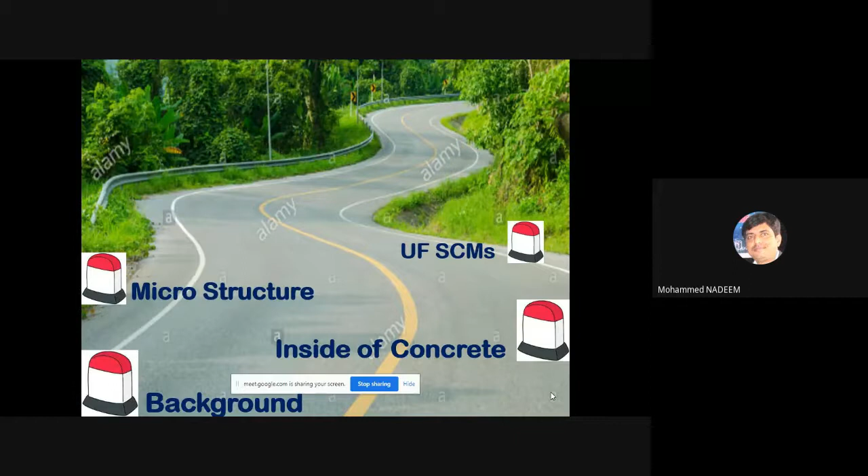So we'll see inside of the concrete. We will go a little towards the microstructure of concrete. Then we will see the ultrafine SCMs, supplementary cementitious materials. We will see the durability tests, case studies of national and international projects, various specifications, and conclusion.

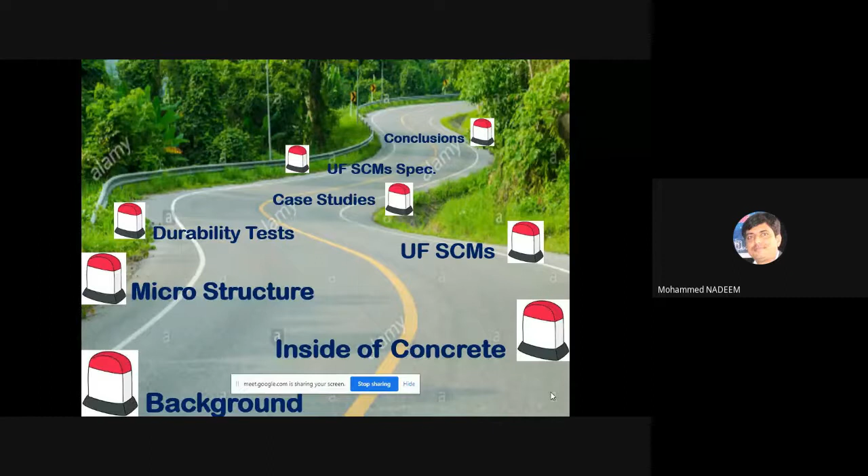Coming back to the importance of concrete microstructure. If you want to see the properties of any material, it is always governed by its internal structure. For example, in steel, if you change a small quantity of carbon, you get a different quality of steel. In concrete, porosity rules the properties. Of course, there are other properties we need to look into, but when we talk about durability of concrete, if you work on the porosity, most things are covered in that aspect.

So if you focus on the porosity of concrete, of course this porosity is at a microstructure level, most of the issues will get rid of from the concrete. And we are talking about a service life of 100 years or 150 years, which is possible if you focus on porosity. So in this topic we will focus on porosity and how to overcome this porosity issue in concrete to get durable concrete.

So in some sense, what is not there governs the material behavior. A best example is the present pandemic. Coronavirus is so fine, at a micro level it's less than one micron. But just see the havoc this created in the world, not only in India but across the world. And that's why even these vaccines are all being worked at a micro level. So it's a practical example. Whatever big thing is happening, people are becoming sick, a lot of fatalities are happening, but it's because of this very tiny coronavirus.

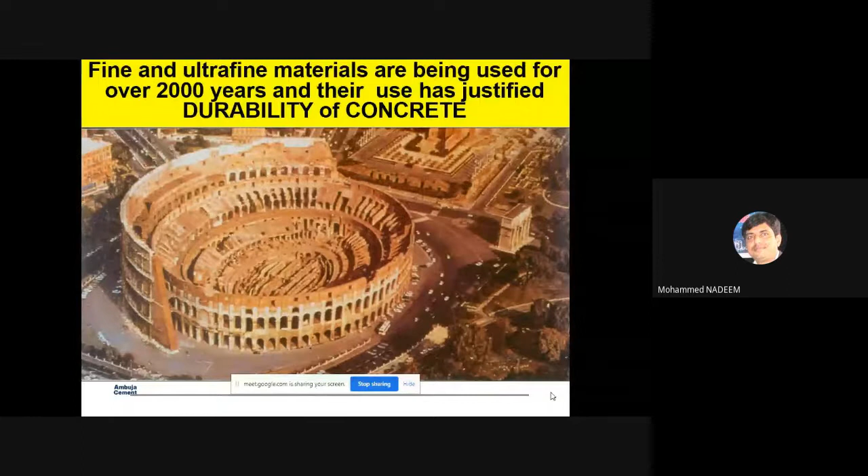If you just see the history, this fine and ultrafine material has been used in concrete for more than 2000 years. Best example is the Romans built the Colosseum, which is still intact in Rome, Italy, and this is reflecting the durability of the concrete. So people used to, along with the cementitious material, use these fine and ultrafine materials in concrete to make it durable. So this concrete is lasting for more than 2000 years.

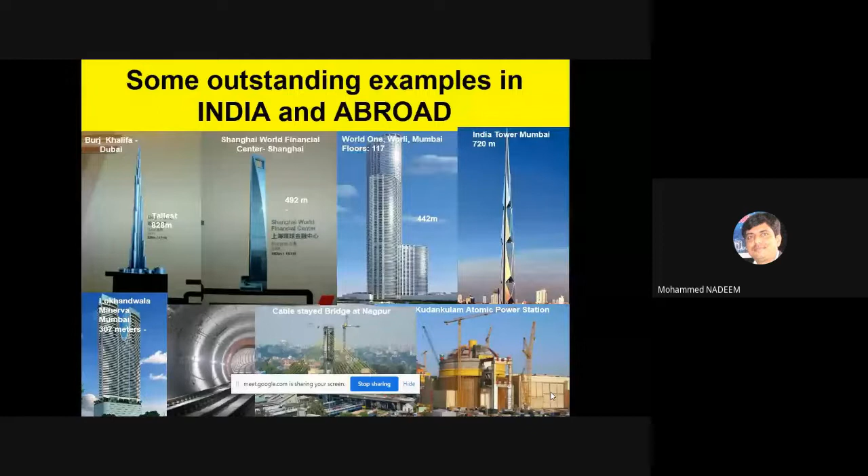Even in the modern world, a lot of structures are being constructed: Burj Khalifa, Shanghai World, even in India, World One, Mumbai. There are many towers which are coming up in the future. So a lot of structures are being built based on the usage of this material. And of course all structures are made up of concrete with a durability, in terms of service life of a structure, of more than 100 years. This is possible not only earlier but in modern structures, people are using it very effectively. Just to give a brief history.

This is how durable concrete... of course high strength concrete doesn't mean durable concrete, but durable concrete goes with high strength concrete. So as you work on the concrete, making it a high performance concrete, both things get associated with this concrete. So this is how we started making concrete.

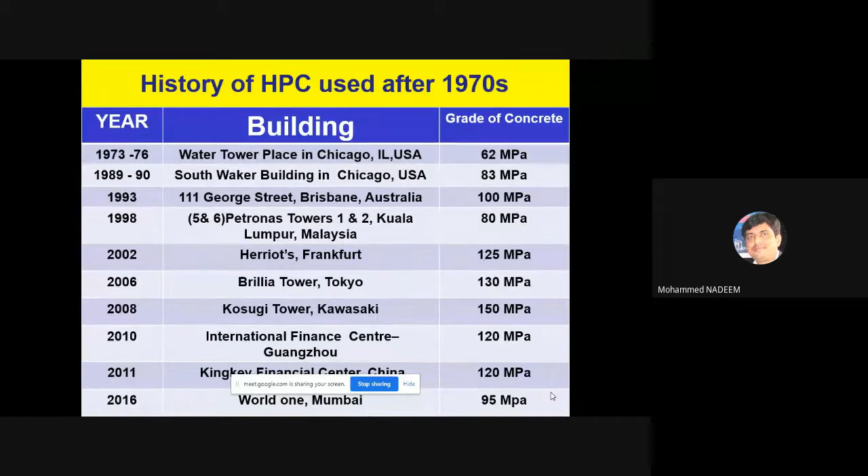Initially we were restricted to M15, M20, M25 grade of concrete. As technological development happens, the grade of concrete, the strength of the concrete increases. Strength of the concrete is also associated with durability, because we are reducing the porosity in concrete, reducing the water cement ratio in the concrete. So in turn, it's a reduction in porosity giving higher strength. There are many structures being built up; in India, World One, Mumbai uses M95 grade of concrete.

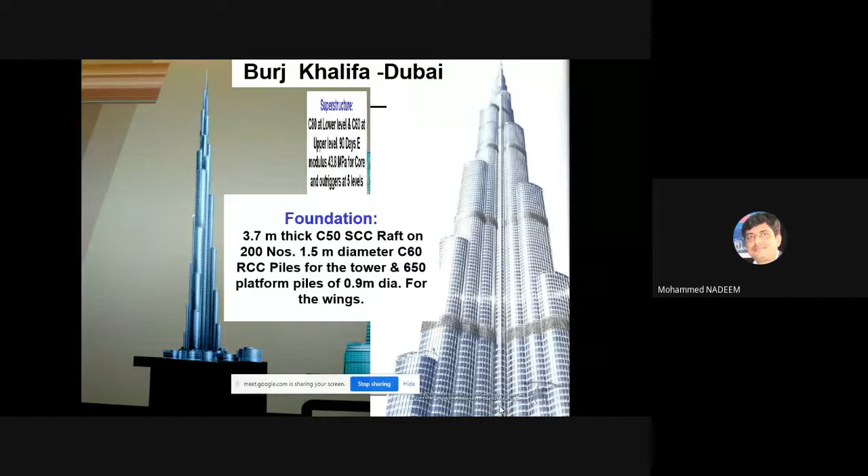There are cases like Burj Khalifa, where they used a different grade of concrete, M60, M65, with different performance requirements. We will not go into detail, as you might have come across these examples in your earlier lectures also.

There are many structures, like in Tokyo, built with M130 grade concrete by utilization of ultra SCMs and other materials, which we will discuss.

In Mumbai, India, Palace Royal, a building already being constructed, uses M80 grade concrete. World One, recently constructed, has an RCPT value of more than 1000 and slump of 200 mm, along with corresponding requirements of elastic modulus and compressive strength.

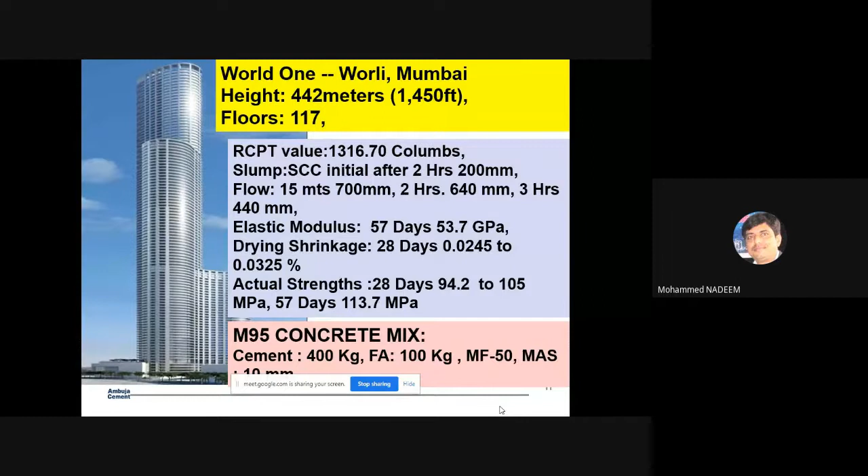M95 grade concrete uses OPC 400 kg, fly ash 100 kg, microfine materials 50 kg, with maximum aggregate size restricted to 10 mm. This is possible and is being used in modern or mega structures in India. So this is a typical mix design of concrete.

If you are making an ultra high strength concrete of 150 MPa, which is practically very challenging, people normally keep flowability at self-compacting concrete levels, because concrete has to be pumped to a height of say 100 story or 80 story buildings. You can't think of manual transportation, you need to pump it, and looking at the congestion of reinforcement, one has to have very flowable concrete. So even high strength concrete needs to be flowable concrete.

For all such concrete, you have to use microfine material along with cement and SCMs in the form of fly ash or GGBS, and then microfine materials, which we'll see. Just look at the water-binder ratio of less than 0.15, 0.18, 0.2, 0.25, 0.3. So for all such concrete, the water cement ratio or water binder ratio is now being restricted to less than 0.3.

Because the ultimate idea is to reduce the porosity in concrete, meaning the fine pores. Once you reduce the fine pores, naturally you have to reduce the water binder ratio. Nowadays a lot of good admixtures are available, PC based admixtures, where you can reduce the water quantity by more than 30, 35, 40%.

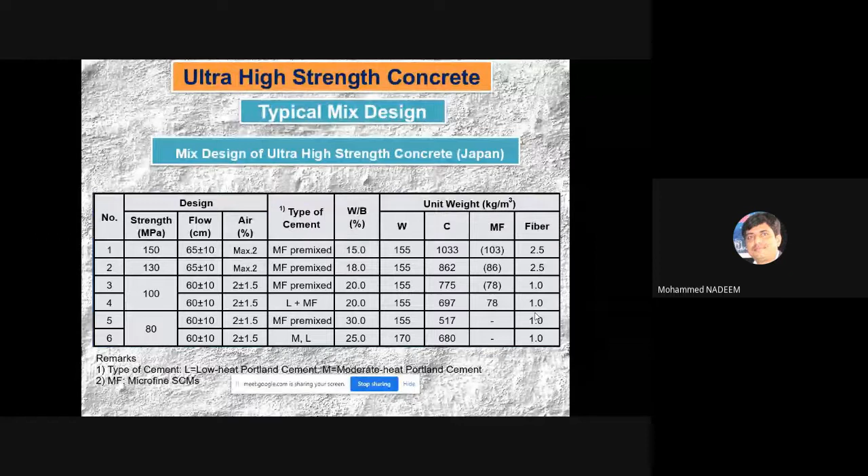If you look at the cement and microfine material being added, sometimes fibers are also added. So these are how you get very high strength concrete with utilization of these materials.

There are many advantages why people are switching from low strength concrete to high strength concrete. If you switch from M40 grade to M60, there will be a reduction of concrete content by 40%, reduction of steel by say 40%, and reduction of construction cost also. Just imagine a building of 70 or 80 stories, and if you switch from M30 or M40 to M60, calculate the savings happening.

There is also extra space available because of reduction in component sizes. If you reduce from M40 to M80, there is a reduction of volume, and your load is also reduced by 30%. For tall structures, wind load governs the design criteria more than static load. So if you reduce these loads and the structure becomes flexible, you get a lot of economy. So there are many advantages in going to higher strength or higher grade of concrete.

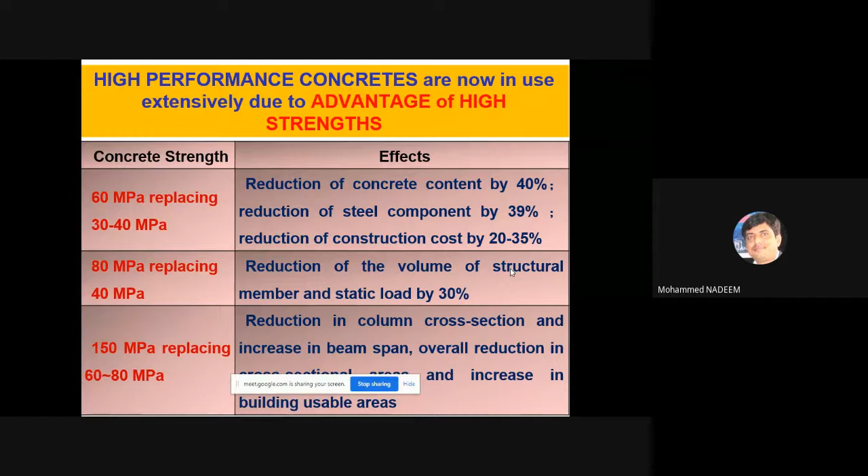This also creates sustainability. We are looking for structures with 100 or 120 years of life without any issues. So sustainability and maintenance cost get reduced, and the overall life cycle cost gets reduced by utilization of this concrete.

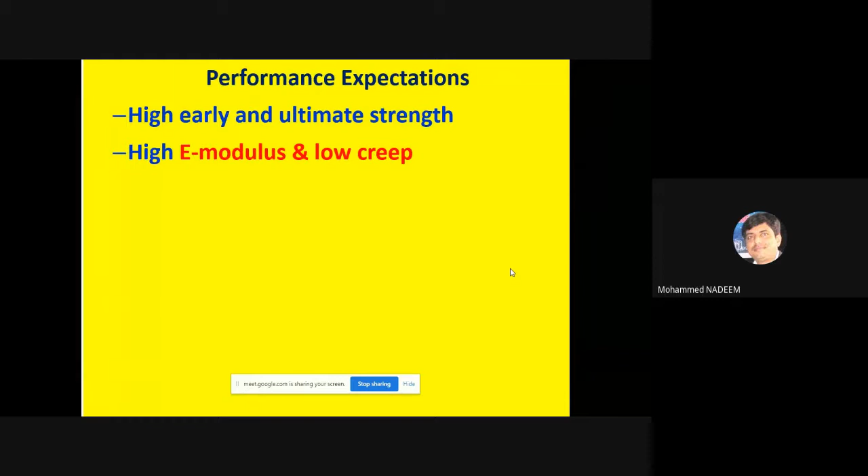So these are the performance expectations. One needs higher strength, and the modulus of elasticity should be high because we are going to very tall structures. There should be low creep because of the tall structures, and high workability as I discussed—people are looking for flowable concrete so it is easy to place in very congested reinforcement, and there should be better rheology also.

The shape of the concrete should not get distorted while transporting from the ground level to an 80-story or 40-story building. The shape of the concrete should remain intact, so rheology of the concrete plays an important role. It should not happen that from ground level to top level there is segregation of the mortar, because then you will not get those properties.

Low permeability, which we discussed, should be protected at a later stage. There should be resistance from sulfate and chloride, frost resistance, chemical resistance, and abrasion resistance.

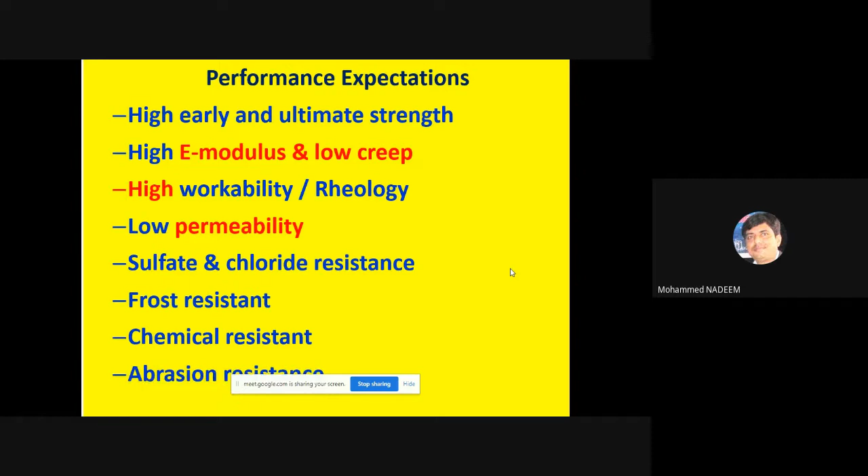But the epicenter of all these properties is low permeability - if you can achieve that, a lot of things will automatically be achieved, like sulfate and chloride resistance. If you have low permeability, these chemicals, which remain in water, subsoil, or the atmosphere, will not attack the concrete. Even chemical resistance and abrasion resistance improve, and naturally you will get high strength. Once you have low pores, you get high strength.

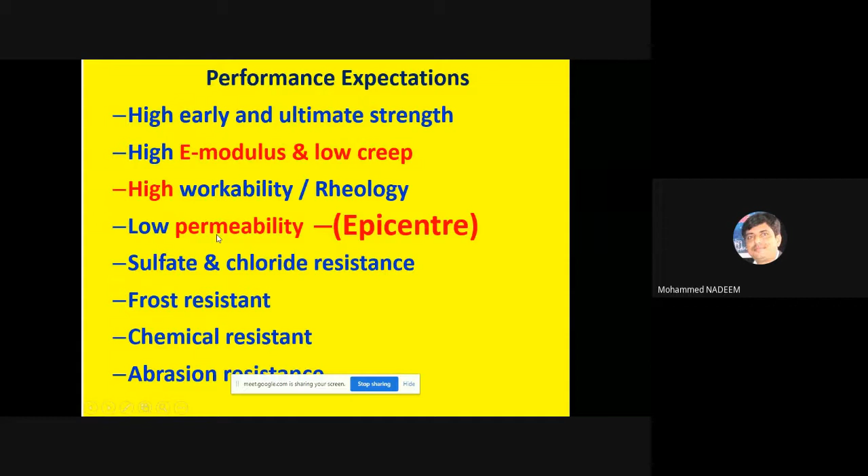So our focus will be on getting low permeability concrete, and this I will discuss in subsequent slides. For these expectations, the specification for the concrete parameters looks like this - this is a typical specification.

People are now talking about elastic modulus, but along with strength it is important to have elastic modulus. Elastic modulus is nothing but the ratio of stress to strain, as you saw in the graph of concrete discussed in your concrete technology subjects. So that is also being specified.

Drying shrinkage is also becoming important, because once you have very high strength concrete, drying shrinkage happens, so that should not exceed the limits. Otherwise there will be cracks, and the very purpose of making impermeable concrete will get defeated. So we want both higher strength and these other aspects.

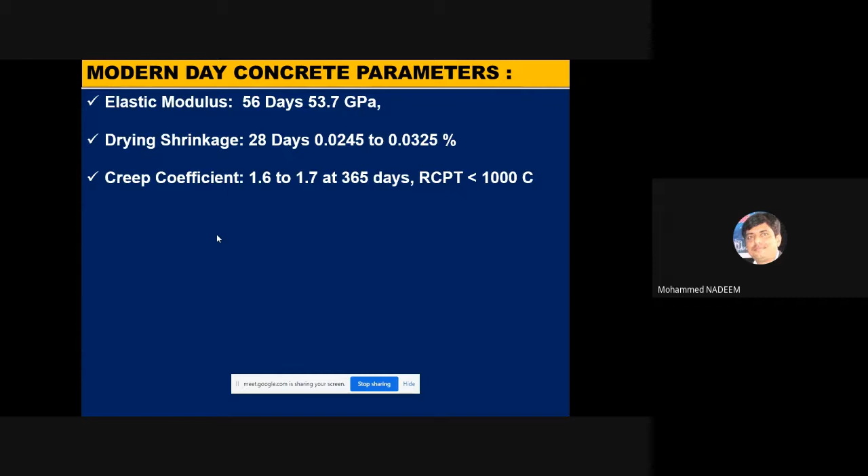Creep coefficient - since we're talking about very tall structures, 120 story, 130 story kind of buildings - naturally creep coefficient becomes very important. Then RCPT, which we will discuss, should be less than 1000 coulombs. ISAT and other tests are related to durability - ISAT is the surface absorption test.

Water permeability should be less than 10 mm. Chloride diffusion - once you have low permeability, all these things should be at a lower level. These are the tests which confirm that this particular concrete is good and can sustain a life of more than 100 years.

So concrete should satisfy, along with strength, these parameters, so that we can say this concrete can last long, or have a service life of more than 100 or 120 years. Temperature is also being restricted.

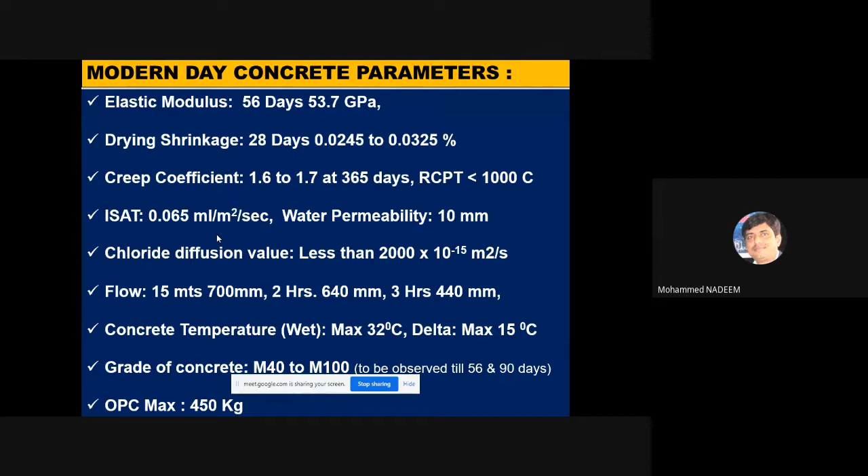Grade of concrete can vary depending upon the strength requirement, from M40 to M100. Cement content is also being reduced, and all these parameters are linked with the design life, which we are looking for as more than 100 years.

Now coming to cement, one by one we will unfold this and go into the microstructural world. If you see cement, which you already studied in concrete technology, there are 4 major compounds in cement: dicalcium silicate, tricalcium silicate, tricalcium aluminate, and tetracalcium aluminoferrite.

Among these 4 major compounds, 2 are important - they give the actual strength in concrete: tricalcium silicate and dicalcium silicate. You might have learned that tricalcium silicate gives the major strength, but on the other side gives more heat of hydration. Dicalcium silicate gives strength too, but the rate of gain of strength is slower in the initial period.

Then later on, development happens. We just saw the history. In 1970, people started developing concrete grades of 60, 70 MPa. Naturally, the requirement of high strength, early high strength cement started coming from that aspect.

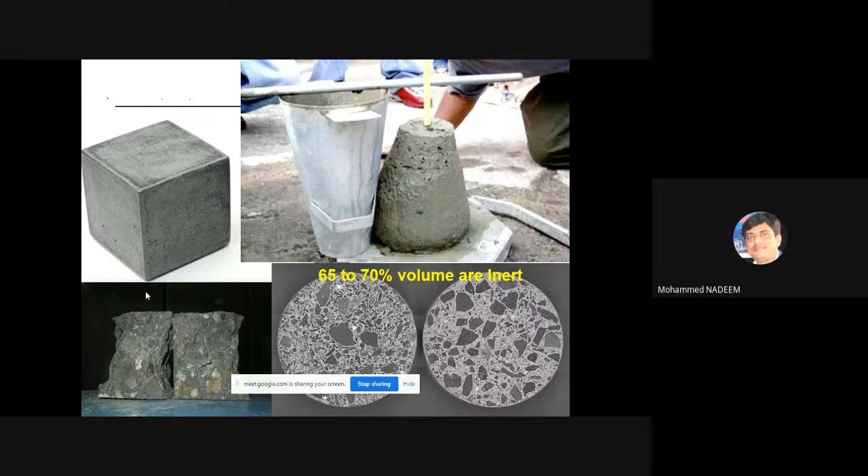So we have to work on the 15% of the volume which we are adding in the form of cementitious material. Among them also we will go further deep dive into that matrix. So hardly any very fine percentage remains which we need to focus on, and then we will be able to achieve a very durable concrete. So our scope remains at a very low percentage, say 10 to 15%, and lower than that we will see.

So this is how our concrete looks. This is the initial stage, where there are coarse aggregate, fine aggregate, and water being added, and this is a cement paste. So in the initial stage, you will see 40% is the solid part in the form of aggregates in terms of volume, 60% in the form of paste, maybe paste of mortar, sand, cement, water, and slowly hydration happens.

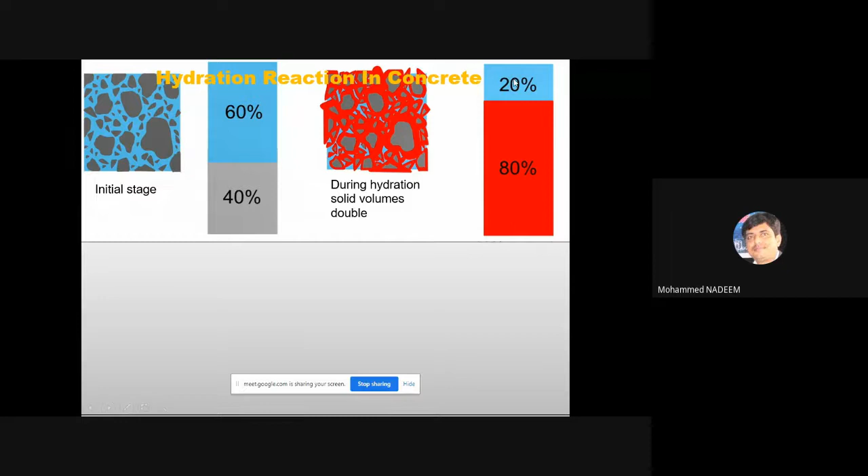During the hydration, solid volumes go on increasing in the concrete, and then at a certain stage 80% of the volume becomes solid, 20% becomes, you can say, fine pores, in the form of some paste, where reaction is still going on in the concrete matrix.

So if you see the normal reaction of cement, once we add water into cement, it creates CSH gel. CSH gel is nothing but calcium silicate hydrate, which gives the strong bond that actually provides the strength to the concrete.

Along with this, there is a component developed which is calcium hydroxide, which is a little bit weak. This is responsible for maintaining the pH of the concrete. The pH of the concrete is in the range of 12 to 13, which is good for the reinforcement, because in an alkaline environment there will not be any corrosion.

So on one part this provides the alkalinity, but on another part this is a weak component which can again react with carbon dioxide and leach out. We call it free lime in the form of calcium carbonate. So this also we need to utilize further, because this is a weak component and it creates fine pores in the concrete.

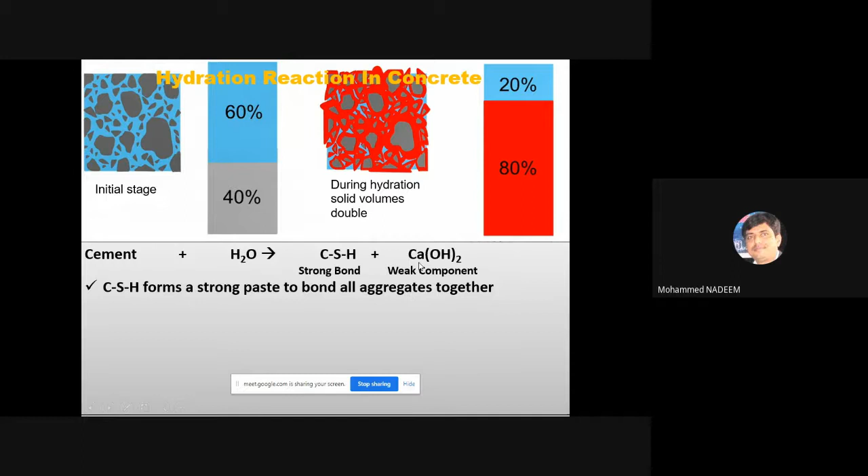We already understand that because of the hydraulic nature of the reaction, there is heat of hydration in the concrete.

In terms of chemical reaction with cement, only 50 to 60% of water takes part in the hydration reaction, and the rest gets evaporated later on. That evaporation creates fine pores in concrete. So we want this water quantity on the lower side, because if 40-50% water evaporates from the concrete, it creates a lot of pores or voids in the concrete.

We earlier understood that durability is directly linked to porosity. If your concrete has low porosity, the lower the porosity, the higher the durability. So we need to understand how we can reduce the component of water in concrete.

This evaporation creates capillaries in the concrete, which is harmful. If concrete is porous, there will be an aggressive environment present. Water is also there, and if chlorides ingress into the concrete, there will be corrosion. Once our reinforcement starts corroding, the volume increases to almost 5 to 7 times, and cracks appear.

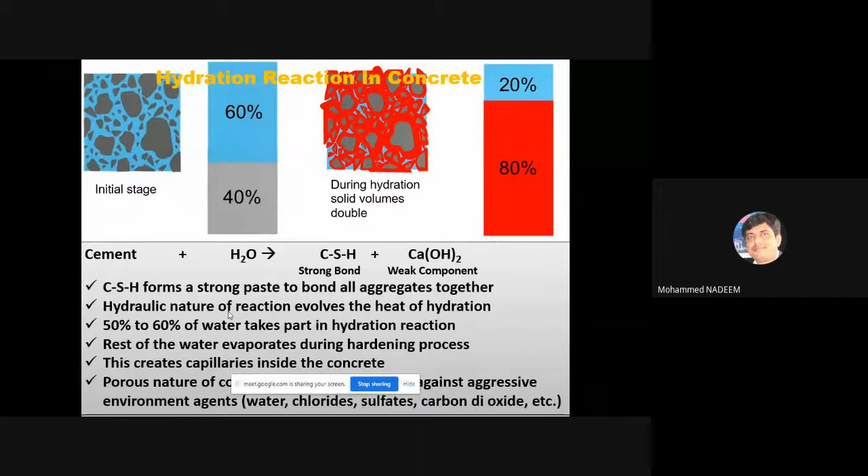Once there are cracks, there will be spalling of concrete and a lot of issues. Here we are talking about 100 years of life without any issue or maintenance. But if this porosity is available in concrete, there will not be any protection against that. Sulfates and carbon dioxide are also present in the environment.

So these aggressive environmental agents are always present around concrete. What we need to do is make the concrete less permeable, so that even if these aggressive agents are available, they will not be able to affect the surface of the concrete. Just to understand the phases we already discussed, there are 4 major compounds in concrete.

After reaction, these compounds get converted into the form of CSH, which is 48% and increases slowly later on. There are anhydrous, unreacted cement particles, because 100% cement particle reaction is not possible. There are also pores, which we understood are created because the excess water gets evaporated.

There are other components. CH is calcium hydroxide, which we understood is good for maintaining alkalinity, but too much percentage is not required, because the rest of the quantity gets converted into calcium carbonate, which is leached out of the concrete and again creates pores. So not much of that quantity is required.

We want to consume it again. And there are aluminoferrite components, which are formed through C3A and other components. This is how it happens.

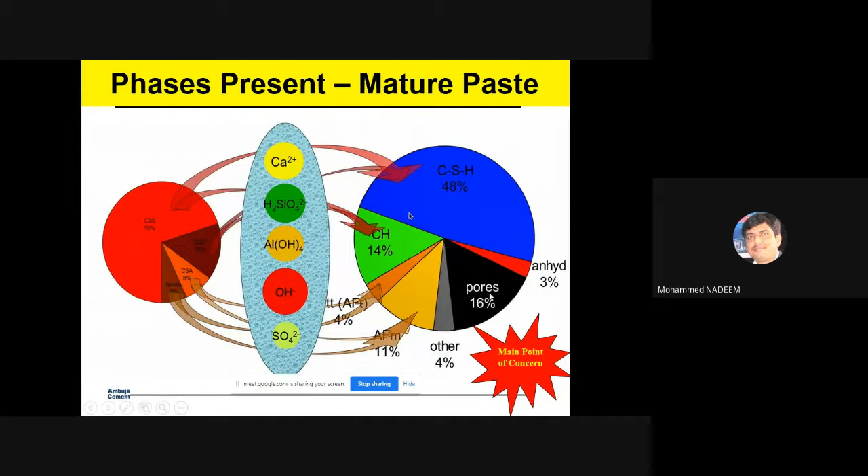So we are worried about these pores. For hydration, we earlier discussed that though we have components like tricalcium silicate and dicalcium silicate, it liberates a lot of heat into the concrete. At 90 days, this is about 104 calories per gram of cement.

More liberation comes from tricalcium silicate, and tricalcium aluminate also liberates a lot of heat initially. That's why this is also being restricted, though in terms of percentage it is only about 7 to 8%. So the major heat generated in cement comes from tricalcium silicate. Later we have C3A, C4AF also, but again the percentage is quite low, and then C2S.

This is how the formation happens in the beginning. Because of the presence of gypsum, there will not be any reaction for about 2 to 3 hours, and later on the reaction happens progressively like this.

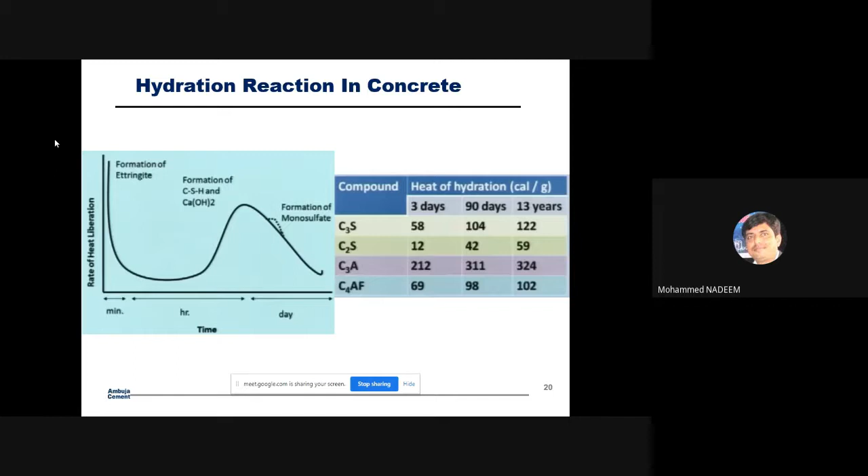There will be maximum heat of hydration at around 3 to 4 days, and then it gets reduced because by now tricalcium aluminate has reacted, C4AF has reacted, most of the tricalcium silicate has reacted, and then C2S starts reacting. This is how heat of hydration is liberated in concrete.

If you see your concrete through the electron microscope, it looks like this. You have calcium hydroxide, which looks like this. These are unreacted cement particles because water has not touched the cement particle, so it remains unreacted. This is the inner CSH gel created because of tricalcium silicate and dicalcium silicate, along with other hydrates. So this is how the actual picture of concrete looks through the electron microscope.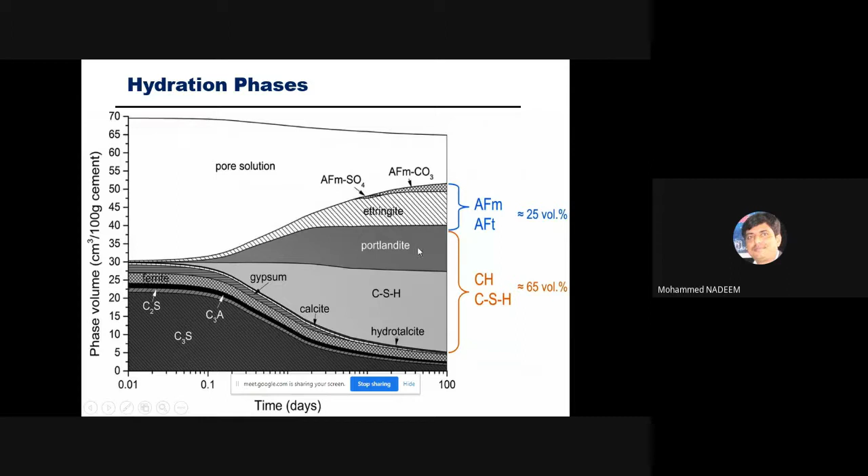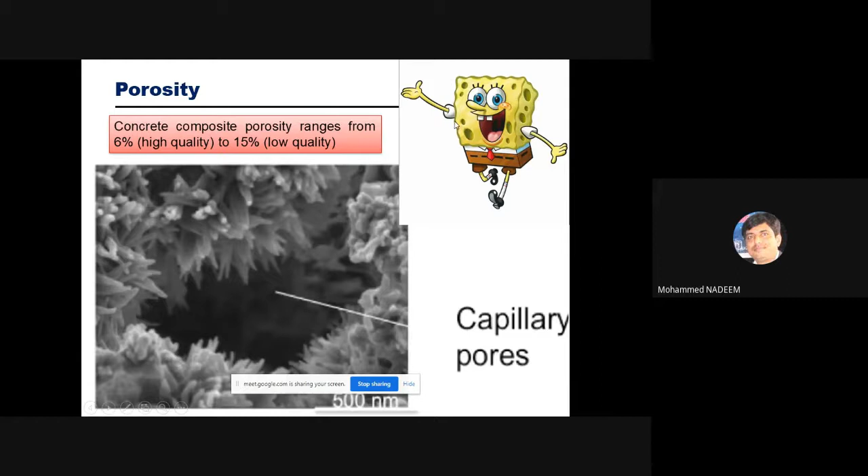It's like a sponge. If you see on the right side, though we call it concrete, it behaves like a sponge if you look at it through the microstructure level.

These are the various fine pores in the concrete with a very fine diameter - in the sense maybe to the tune of 4, 5, 6 micron in size. Just to understand, cement particle size on average is about 40 to 45 micron. So those particles will not be able to effectively enter into these fine pores.

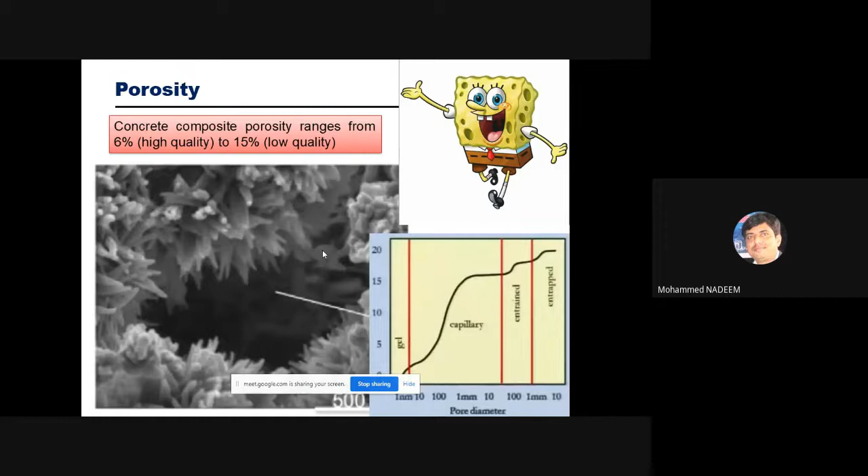So we really want an ultra fine material. That's why we say, if you want a durable concrete, along with cement and your SCMs - normal SCMs in the form of fly ash and GGBS - you need a very ultra fine material, which can go into these fine pores, block them, and achieve particle size packing in the concrete so that these pores get reduced.

Once these chemicals enter into concrete, a lot of reactions happen, which you already know. CO2, if present, reacts with calcium hydroxide to form calcium carbonate, which is stable and leaches out from the concrete. Once you have water and chloride, it reacts with the steel, creating corrosion phenomena in the concrete, and then there will be an issue again. So all these things are directly linked with the fine pores, and that's why we say if you are able to block or reduce these fine pores, a lot of issues will get eliminated.

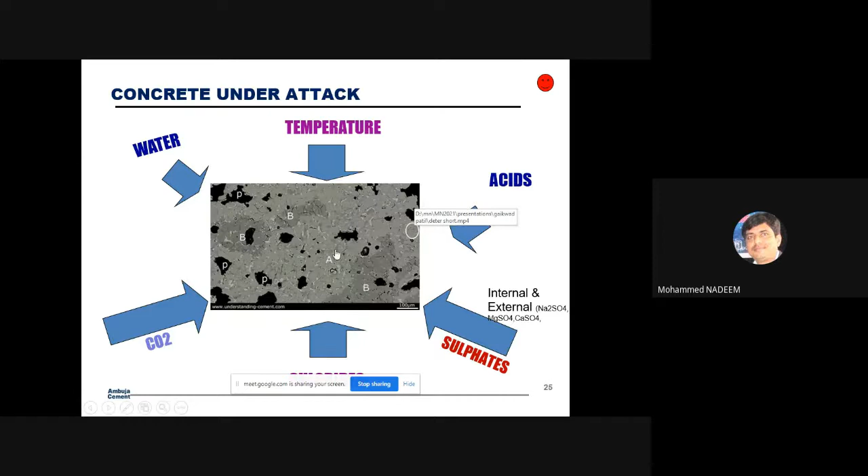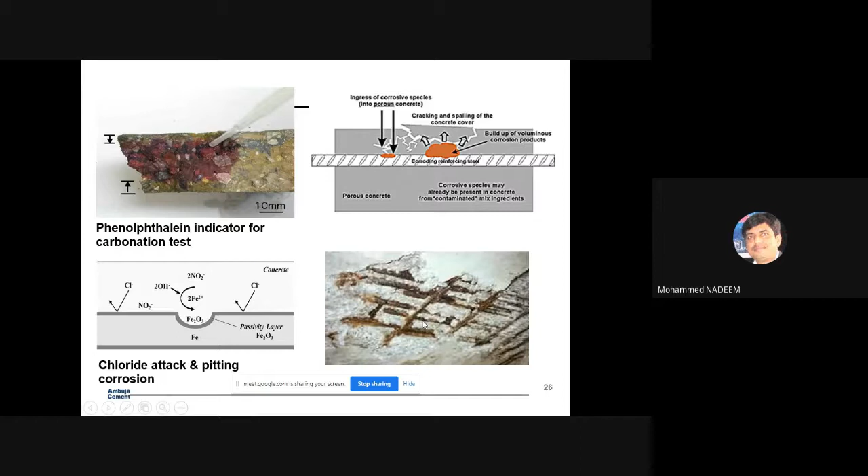So these are the issues. There will be corrosion in the concrete. There will be spalling of concrete, and you will see the concrete surface looking like this. Maybe after 10 years, 20 years, we are talking about a concrete with 100 years, 120 years life. This should not happen. And this is how it happens. Deterioration of the concrete - at various locations you might have observed this kind of issues or corrosion.

There are 4 steps to achieve durability. First and foremost is to reduce the porosity. This porosity is because of the paste component. Naturally, along with cement, you need a microfine material, which should be much finer than the OPC or fly ash or GGBS. Along with this, you need to reduce the water cement ratio.

So a lot of admixtures, PC based admixtures, are available. Along with this, the third step is to reduce the calcium hydroxide. Naturally, you need to use pozzolanic material. Pozzolanic material is available in what we call SCM, supplementary cementitious material - fly ash, GGBS - which are very useful to utilize this calcium hydroxide, which is a weak component. And the fourth step is to increase the packing density.

So now we understand that cement particles, though from our point of view are very fine, from the microstructural level are not fine material. The average size D50 is say 45 micron, whereas we are talking about pores having a size of say 10 micron, 15 micron. So this cement particle will not be able to plug these fine pores in concrete. You need a microfine material much finer than the cement.

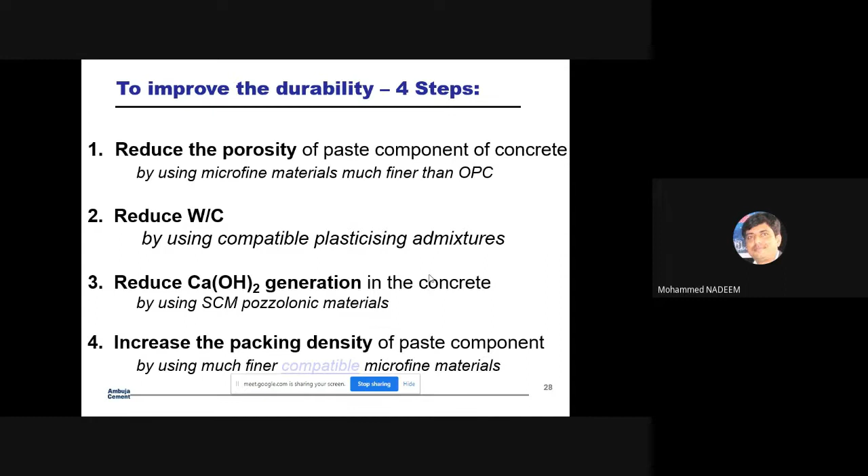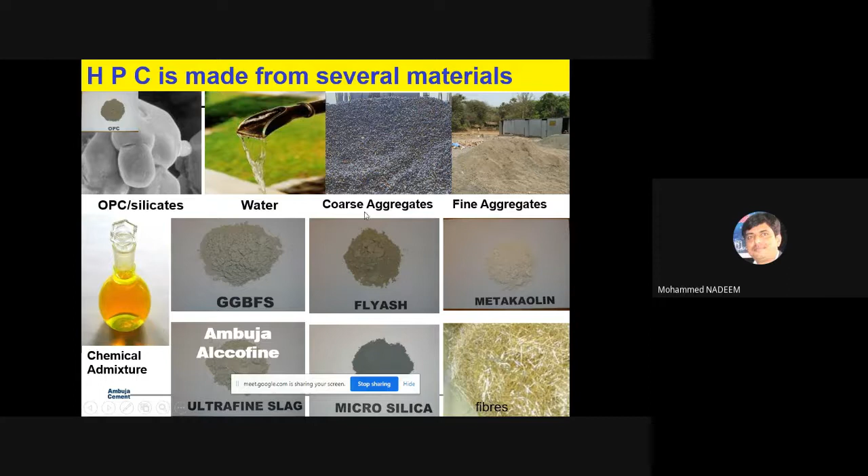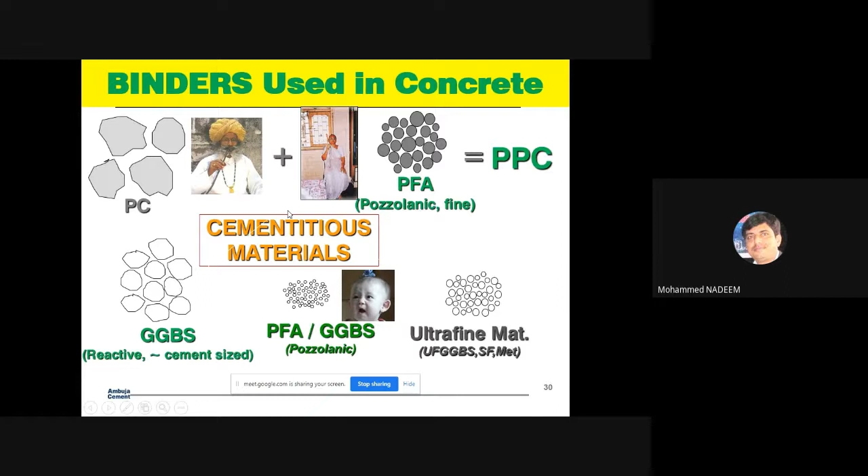So you have a matrix being explained in a very simple way. One can't think of concrete without PC, Portland cement - one has to use it like the Dadaji of the family of concrete. Then you have a Dadiji in the form of, along with the cement, you have to use the pozzolanic material in the form of either fly ash or GGBS. But that is also not sufficient. Along with this, you have to use the smaller family members in the form of ultrafine materials. So combination of these family members will create a very dense matrix of paste, which is responsible for reducing the fine pores in your concrete. So this is how a simple reaction is being explained. You have a cement.

Once you add water, you get CSH, which actually imparts the strength in your concrete. But along with this reaction, the byproduct comes in the form of calcium hydroxide, also referred to as Portlandite, which is a weak component, because later on it reacts with other components in the form of carbon dioxide, and it's not useful.

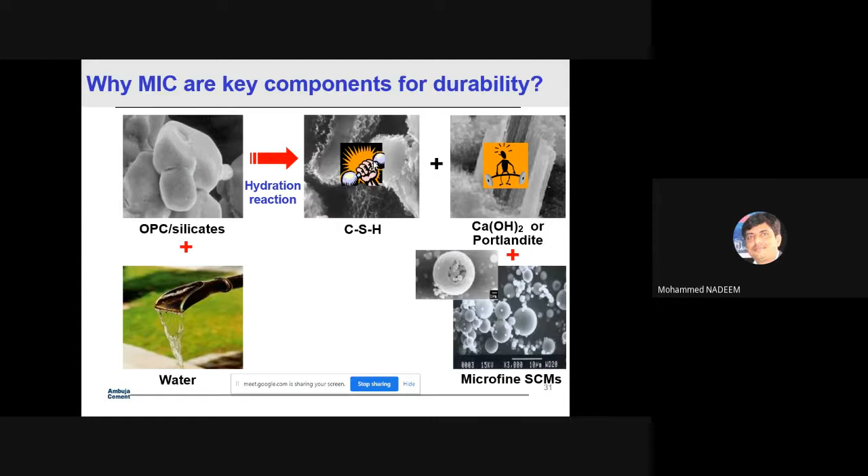So why then we use the supplementary cementitious material in the form of fly ash, GGBS, ultrafine GGBS, microsilica, so that utilizes this, and then again you will get a CSH gel, which again gives the strength. So these are the whole matrix works.

So in terms of SCMs, of course one has to use cement, but just to understand, it's like an antibiotic. Suppose if you are having a fever, the doctor gives you antibiotic. If you go to a homeopathic or Ayurvedic doctor, they say it's very harmful, and naturally it is. But one wants a very quick reaction, so naturally one has to consume the antibiotic. We can't sometimes go away from the usage of antibiotic. But along with antibiotic, they give some vitamins. You have to consume that, otherwise there will be a lot of side effects.

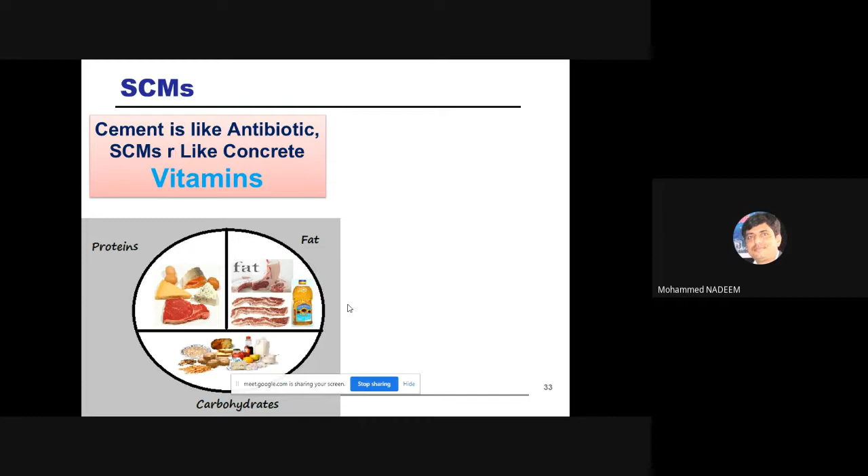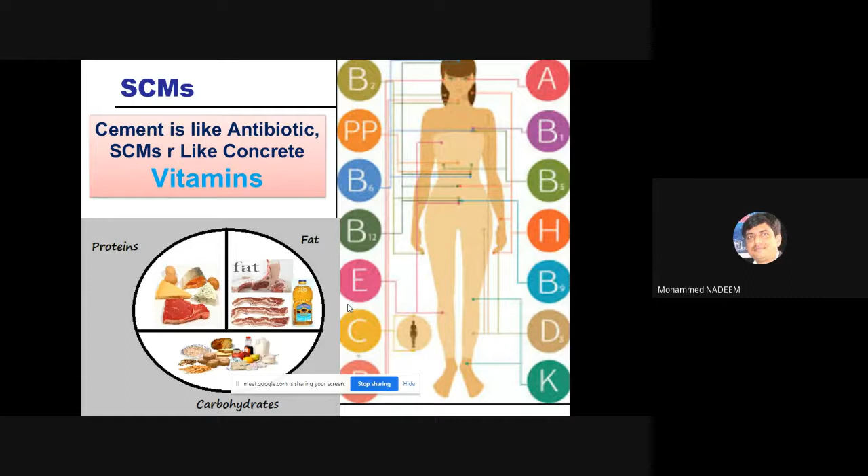So in concrete, we can't say without cement right now. With the present technology, we can't eliminate hydraulic cement. Maybe in future there are works going on where we completely eliminate hydraulic cement, and some other binders are coming up, which may take some time. But in the present situation, cement we can't avoid, but we have to use it along with SCMs, which is like vitamins in our body. Once combined, whatever ill effects are coming up because of the cement get nullified because of these SCMs.

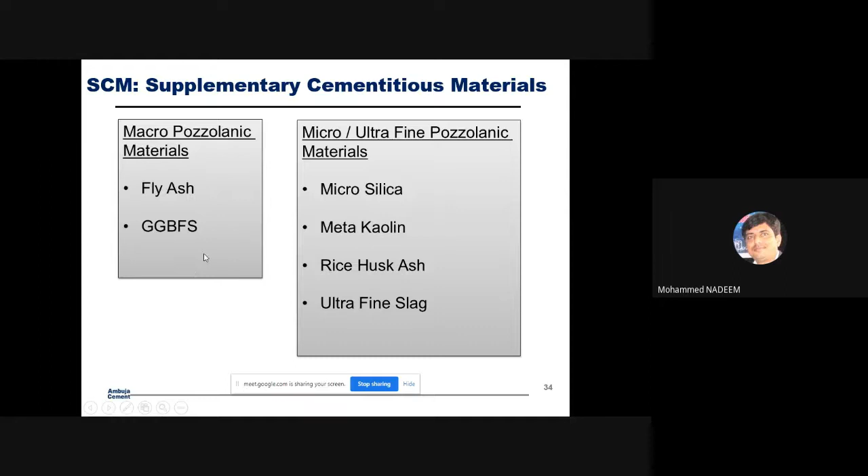So these SCMs in the form of fly ash and GGBS are at a microfine level. But again, we need an ultrafine material in the form of microsilica, metakaolin, rice husk, or ultrafine slag. These are the ultrafine materials, and along with the microfine material, we have to use it in concrete.

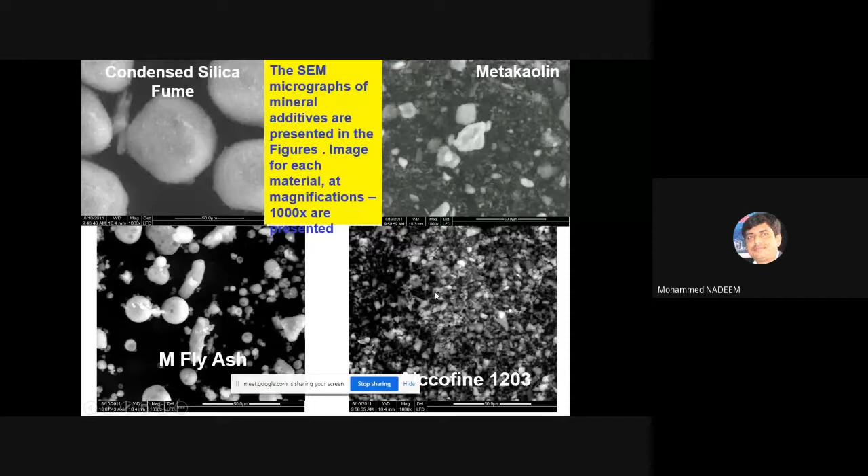If you see the electron microscope pictures, this is silica fume, this is metakaolin, microfine fly ash is also available, and microfine ultrafine GGBS. This is our own product, Alcofine 1203. We call it ultrafine GGBS, or Alcofine 1203, a very fine material to be used in concrete.

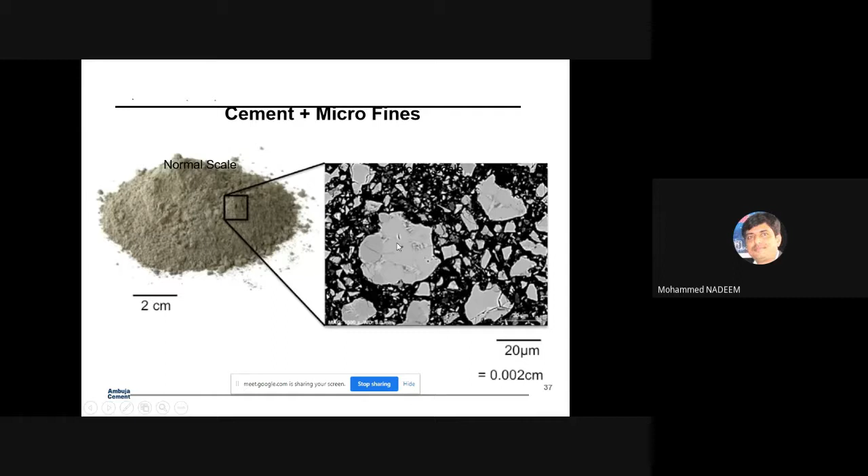And you will get this kind of results. So all the fine pores in the paste, in dry form, also show these views. If you see, the larger particles are cement particles, and these very fine materials are the ultrafine materials. So the combination of this actually enhances the particle packing density of the cement paste.

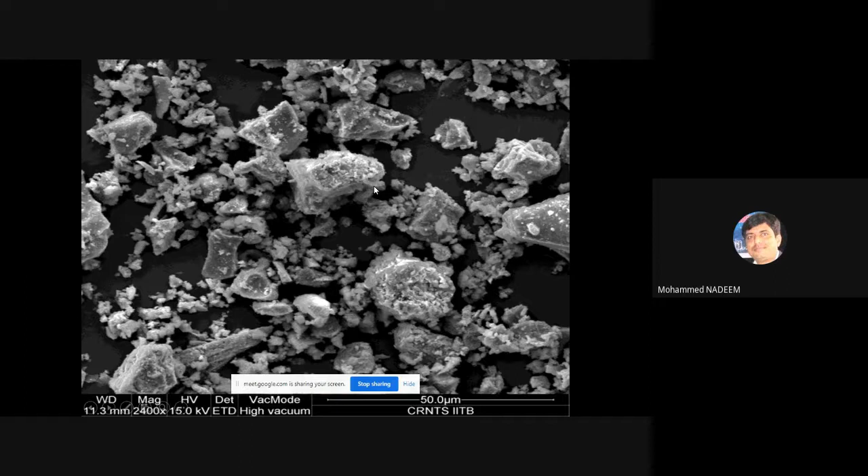So this is conventional cement, and once you add ultrafine material, you get very fine particle packing, which was also explained in the earlier picture.

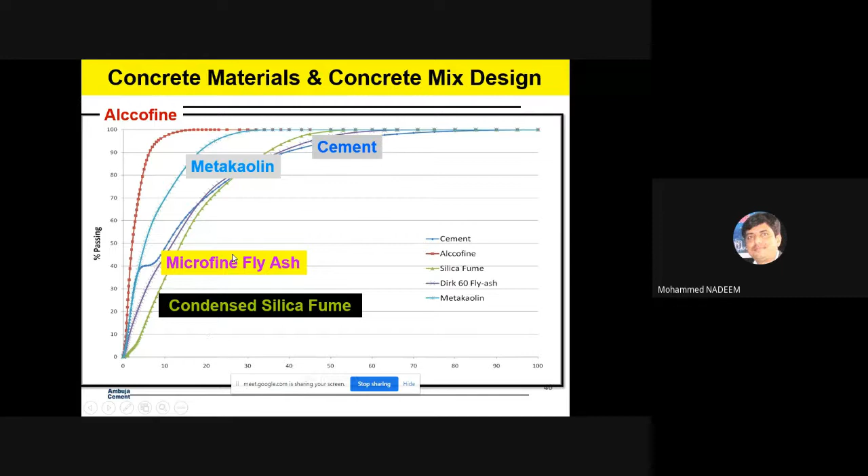The PSD, particle size distribution, is being explained here. This is our Alccofine, metakaolin, this is cement, microfine fly ash, and condensed silica - very, very fine materials, quite finer than cement. Of course, particle size distribution is measured in terms of particle sizes - D10 means 10% of this size particle, D50, and so on up to 90%, 100%. So these are the sizes, very fine materials.

If you see, D90 is 9 micron. In terms of cement, the D value is around 75 or 80 micron. So it's quite fine.

These are the chemical compositions of these materials. Along with OPC, you have Alccofine, fly ash, silica fume, metakaolin, and rice husk. Most of the materials are either silica - silica fume is majority 86% silica. Metakaolin is a combination of silica and alumina. Alccofine is a combination of both, having cementitious properties towards the OPC. So you have silica, alumina, and calcium oxide also.

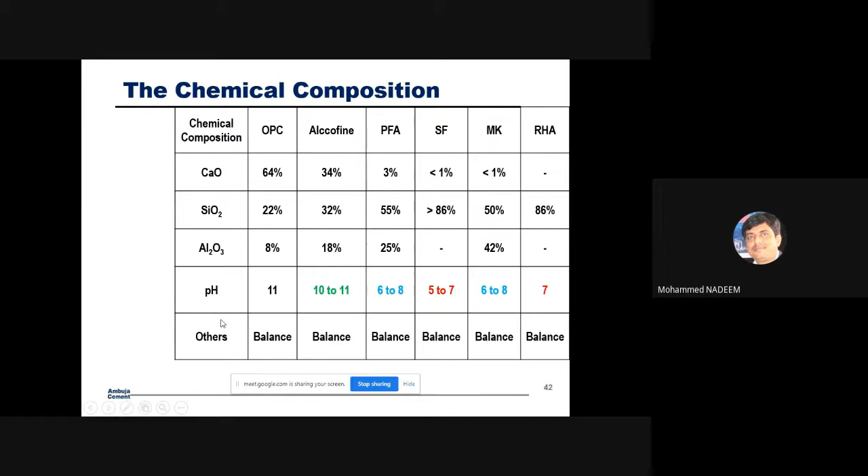Advantage is pH. It should be towards the alkaline range, maybe 11, 12, or 13 kind of numbers.

These are the tests being done on pozzolanic activity, whatever the pozzolanic material being reacted with cement, and it gives the activity index.

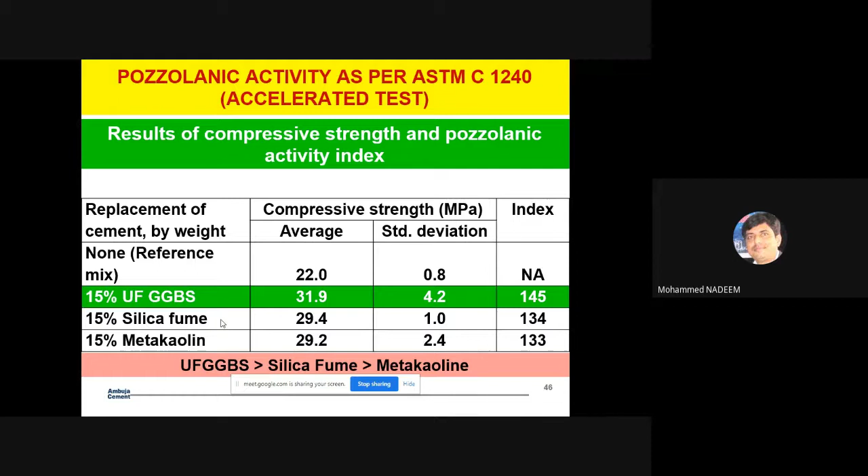Just to measure the permeability, there are various tests. Of course, not in Indian standard, but there are American standards. A lot of tests are there. One is RCPT, rapid chloride penetration test. There are many tests - there is a 90-day ponding test. There is a chloride diffusion test, normally known as NT test, NT443, or Nordtest. ASTM C1585 rate of absorption test.

Nowadays this test is being used a lot - rapid migration test, NT492, in many of the projects, and RCPT. These are the two major tests being used in most of the projects.

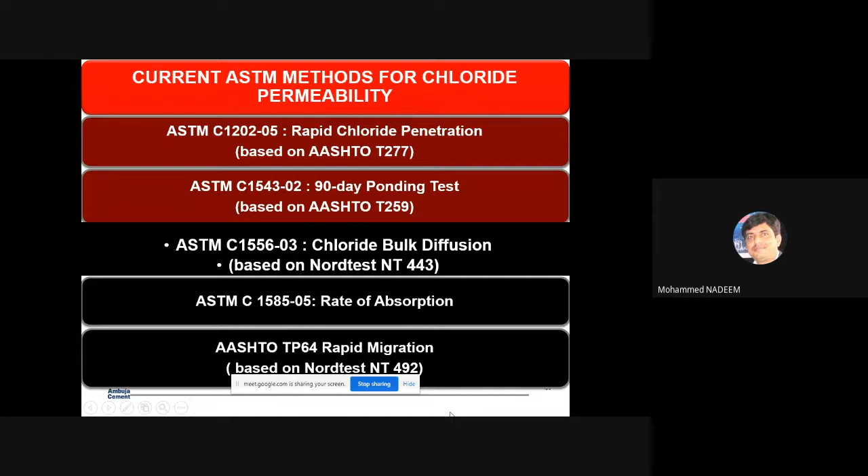RCPT is a very simple setup. I will not explain in detail, but the concrete surface is being penetrated with sodium hydroxide. One side is sodium hydroxide, one side is sodium chloride solution, and then current is passed - 60 volt current. It's basically a cell setup where ions get pushed from one surface to another, which is measured in the form of charges.

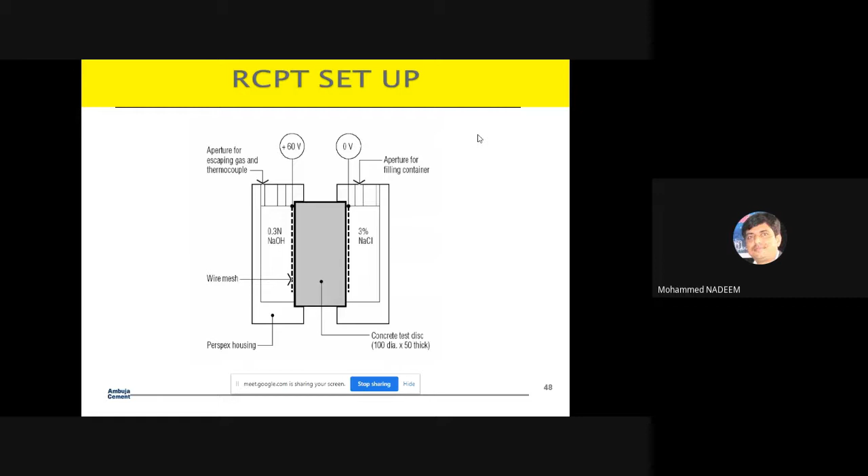Charges are given in the form of coulombs. Coulombs are nothing but how much charge is passed through the concrete. High charges passing means your concrete is more permeable; low charges passing means your concrete has low permeability. So nowadays people are looking for permeability in terms of RCPT less than 1000 coulombs in majority of the structures.

This is a chloride ponding test, just to measure how much chloride passes through the concrete by putting a solution on the concrete surface. If you see OPC, pure OPC, on the top surface it's 0.46 percentage without any ultrafine material. If you add ultrafine material, it gets quite reduced. On the lower surface, hardly any penetration is happening, which is a good sign for the concrete we are looking for. Ultimately we are looking for permeability - there should not be any diffusion of chloride so that our concrete gets protected.

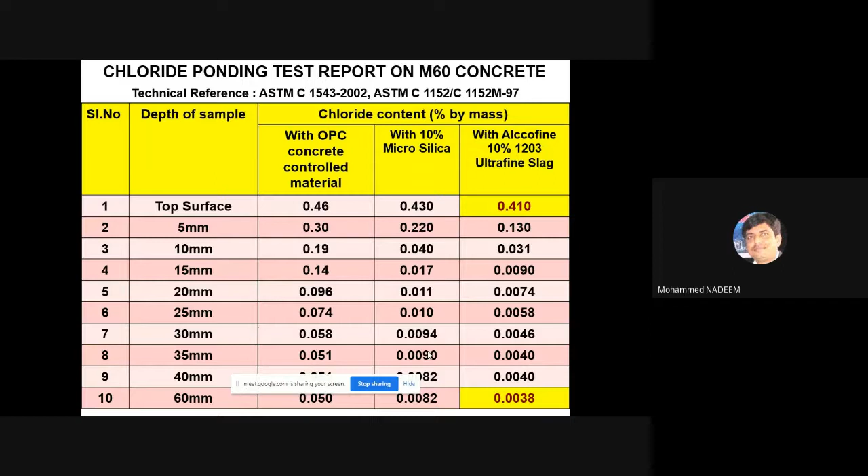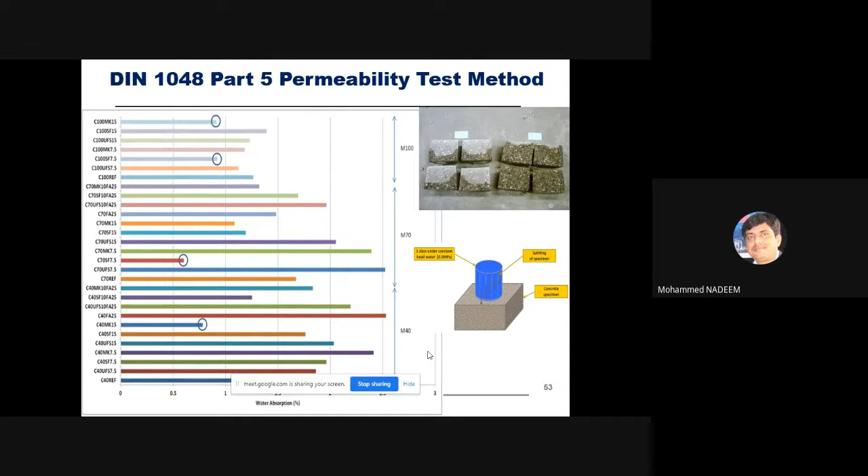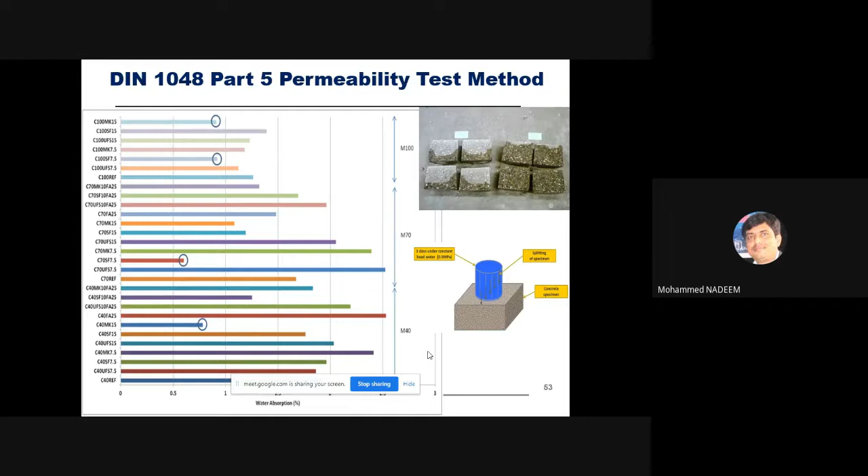And these are water permeability tests you might have done in your laboratory, where concrete is subjected to 5 bar of pressure, and then after 3 days of this pressure, it is measured how much water gets penetrated into the concrete. Once your concrete is very dense, water also will not penetrate into the concrete surface, which is measured in terms of water penetration. Normally people are specifying less than 10mm of water absorption.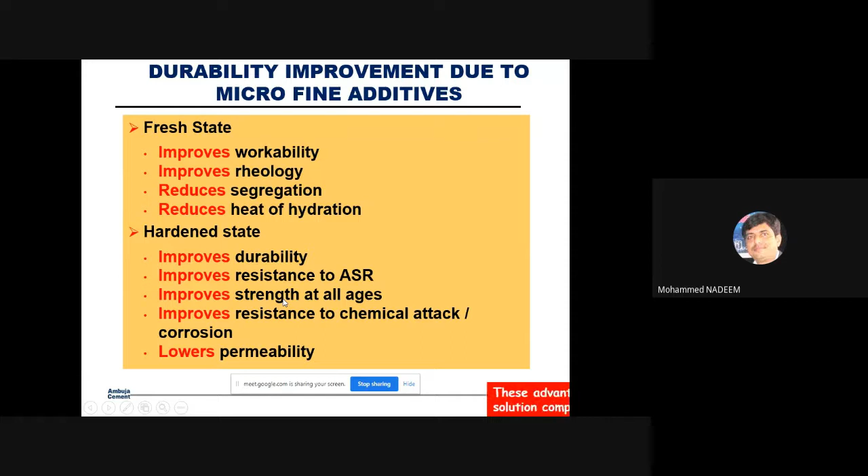Since we are running short of time, for the last part I'll just share the case studies where this material has been used and what the results are.

These are very important structures, and the project is still going on. Those from Mumbai can understand this. There is a bridge construction going on called the Mumbai Trans Harbour Line project. It connects New Bombay, from Sewri to New Bombay, where an international airport is coming up. Currently, someone traveling from Mumbai to New Bombay takes about 3 to 4 hours due to congestion and traffic, having to travel via Vashi, Mankhurd, and Belapur. Just to reduce that travel time, this project is going on.

About 40-50% of the project is completed. It connects Bombay to New Bombay with a stretch of 22 kilometers, and this is the first project in India where such a long bridge, 22 kilometers, is constructed in the sea.

Imagine the aggressive environment in the sea. They did a lot of R&D on how to mitigate durability issues, and came up with specifications requiring RCPT less than 1000, water permeability less than 10, RCMT less than 2. After many trials, concrete was made using only 190 kg of cement, 325 kg of GGBS, and 50 kg of Alcofine. With this combination, they were able to get concrete satisfying those durability requirements.

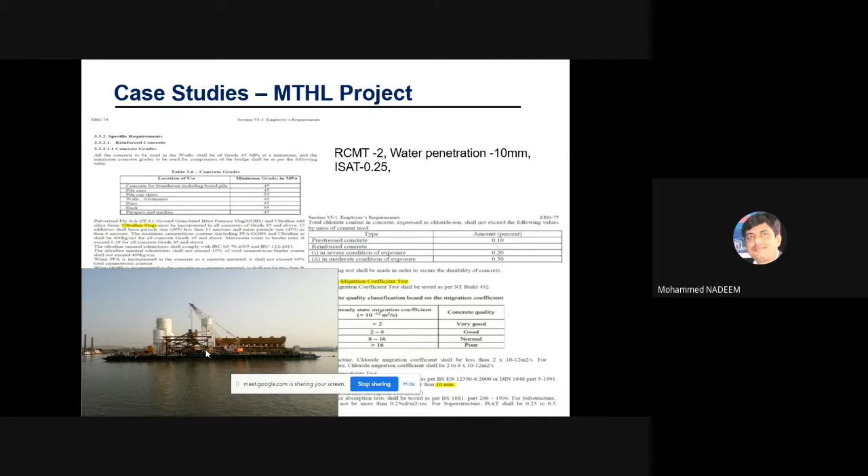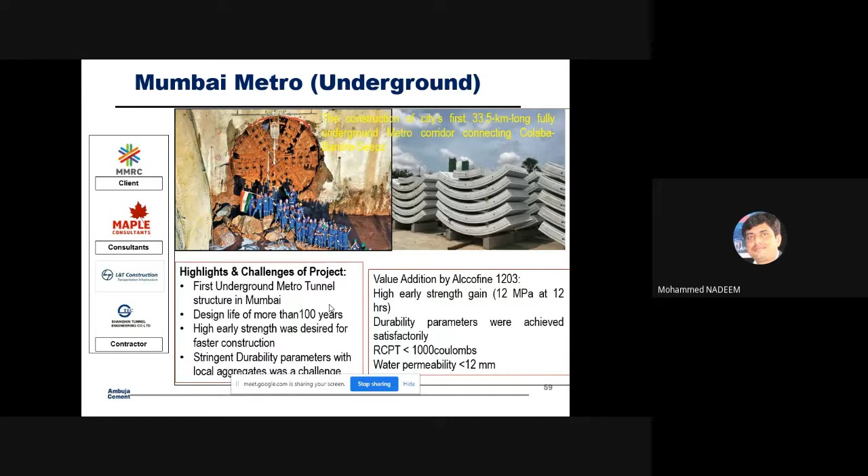Again, this project is going on in Mumbai - underground metro projects. Again a very aggressive environment, and their requirement was early high strength, expecting 12 MPa in 12 hours, since this is an underground metro tunnel where the liners are made of precast concrete. Six pieces of these liners make a complete circle. Again there is an aggressive environment, and these molds are very costly. So they were looking for early high strength of 12 MPa in 12 hours, RCPT requirement less than 1000 coulomb, water permeability less than 12 mm, and a design life of 100 years. There also we supported the solution, utilizing ultrafine materials.

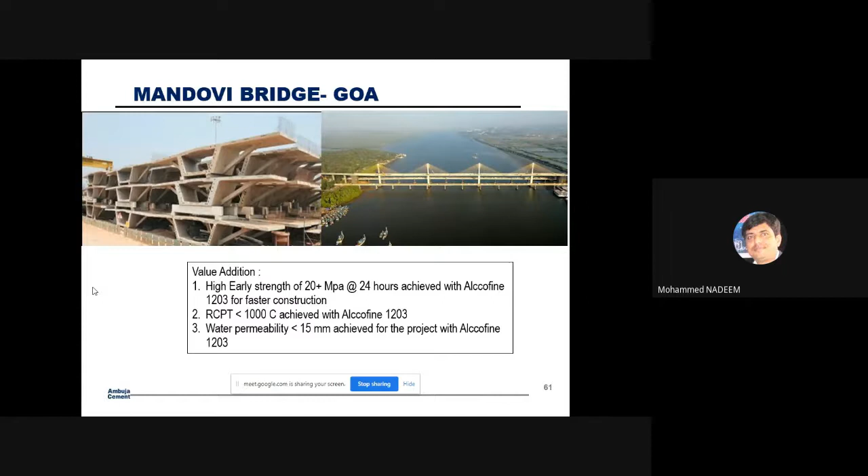These are the mixes and the results. Mandovi, Goa - again there is a bridge with precast components in a very aggressive environment. They were looking for 20 MPa in 24 hours, RCPT less than 1000, water permeability less than 15 mm. Nowadays, all the durability parameters or requirements are specified, and you have to give concrete satisfying requirements at both the plastic stage and hardened stage. These are the mix proportions, mix design.

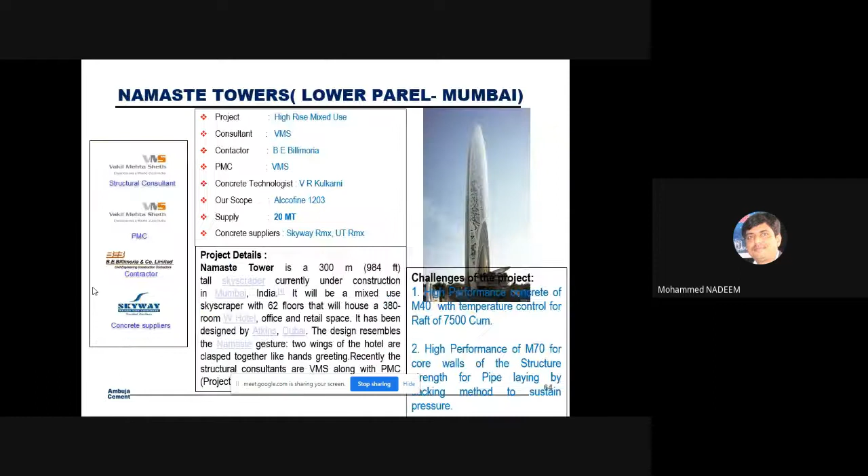To conclude at this last stage - normally ultrafine materials are specified in terms of particle size, since it's very fine, almost 5 times finer than OPC cement. You can't measure it in Blaine fineness directly, but indirectly it's more than 12,000 Blaine, compared to normal cement which is around 2,500 to 3,000 Blaine - almost 5 times finer. Such fine material isn't possible to measure by normal Blaine method, so it's normally characterized with PSD, particle size distribution - D95, D90, or D50. This is how it's specified, along with the ultrafine slag activity index, just to assess reactivity.

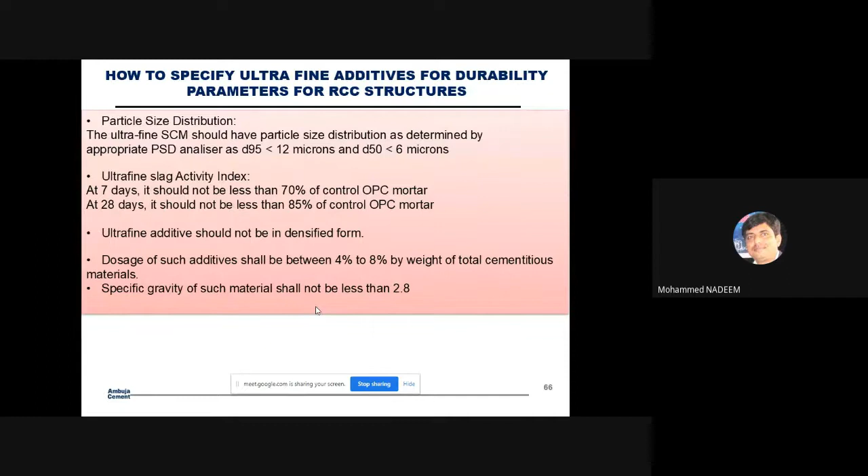Dosages are in the range of 4% to 8% by weight of total cementitious material. One needs to see that specific gravity should not be less than 2.8, meaning it should be compatible with the cement. Cement specific gravity normally ranges around 3.1, so it should be very close to the cement specific gravity. There should not be any mixing issue in that.

So just to conclude, for proper particle packing, we already saw that cement particles, though they look very fine, are not fine at a microstructure level. One has to do particle packing at the cement stage also, using ultrafine material in the range of 5 to 6, 7 or 8%, depending on the requirement, along with fine materials. So you use pozzolanic material in the form of fly ash or GGBS, and then ultrafine materials. The combination of this gets you proper packing in a paste.

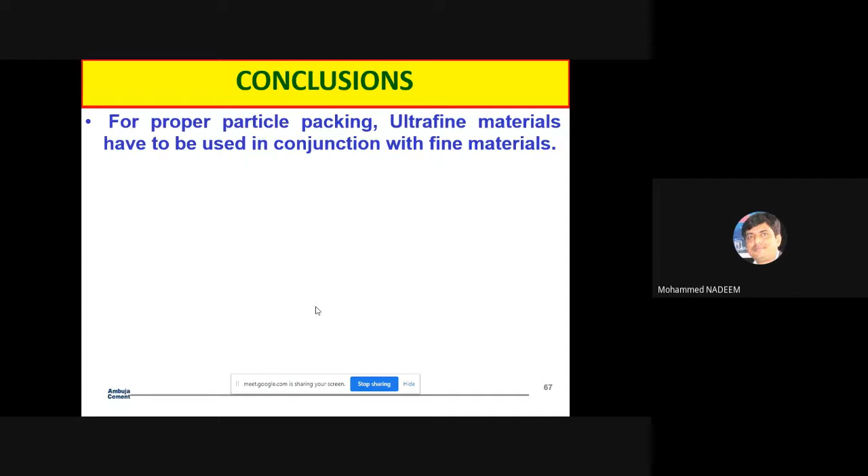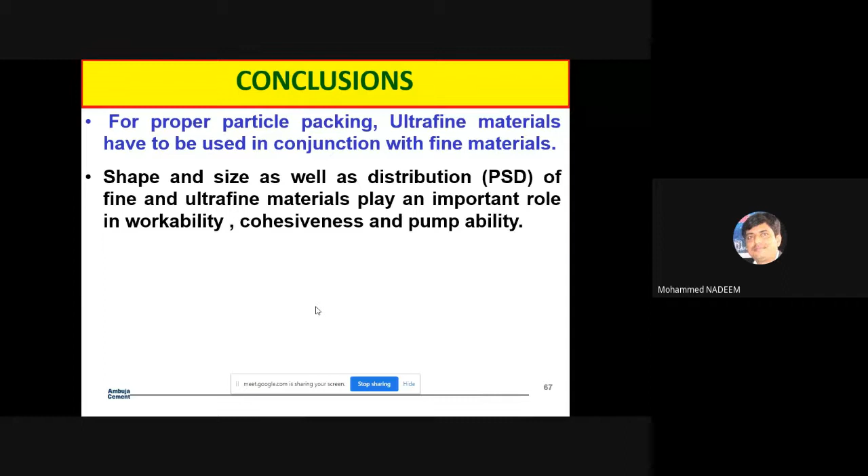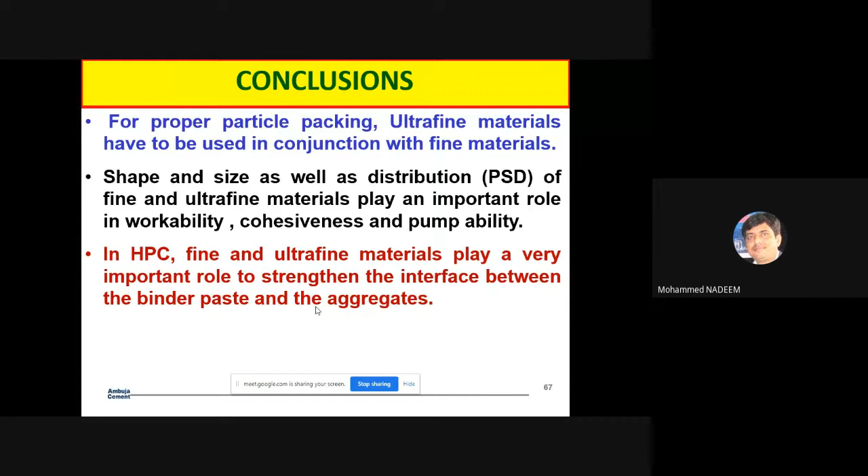The particle size distribution plays a key role. We saw various graphs showing how important it is to have different sizes of particles, so that we reduce the fine pores present in concrete. So we saw that in HPC or durable, long-lasting sustainable concrete, these fine and ultrafine materials play a crucial role to strengthen the concrete and improve its durability.

So free water entry gets reduced in the binder paste. Ultimately we are reducing the chloride diffusion in concrete, so that at the end we are achieving durability and strength gets enhanced because of utilization of these materials.

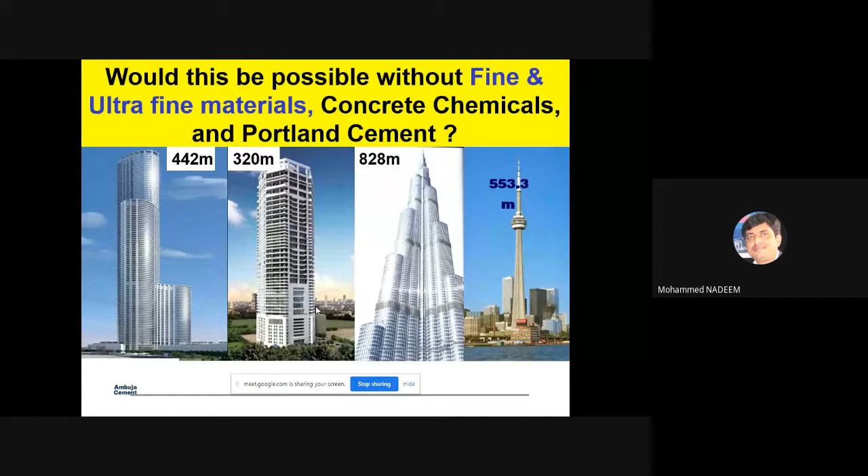So in conclusion, all those structures are not possible without utilization of these materials, along with cementitious material in the form of cement, SCMs in the form of fly ash and GGBS, and ultrafine SCMs in various products. One such product from our side is Alcofine 1203. All those structures would not have been possible without these materials available. Because of the availability of this material, we are touching the sky. A lot of structures, a lot of projects are going on because these materials are available, and these structures are being designed for a service life of 100, 120, 150 years, without any maintenance issue in between, which is possible and which is going on.

With this, I think from my side, thank you very much.

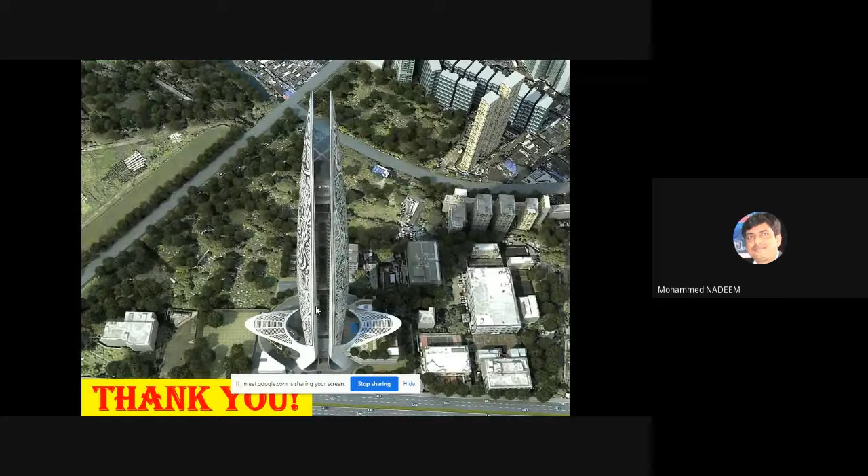Again, this is a building, Namaste Tower, coming up in Mumbai. It's in the shape of Namaste only. With this, from my side, thank you for patiently listening. If you have any question, you can please raise it, I think within the time limits.

Thank you very much, sir, for such a wonderful presentation. The details which you shared in your PPT are far beyond the syllabus which we teach the students from RTMNU University. So very new things were told by you to the students, and I believe that the students will keep this in mind and try to utilize this information given by you in their future projects.